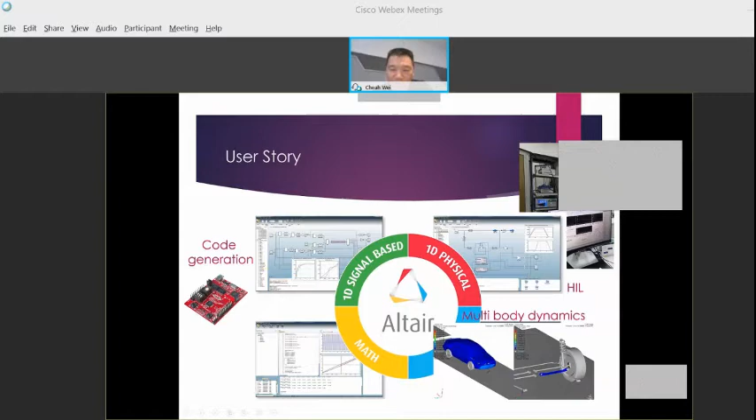And you can also do CFD, computational fluid dynamics, which is used by multiple MNCs. And you can do system level simulation like control systems. And you can even do other domains like electromagnetics. For my case back then, it was the motor design itself, right?

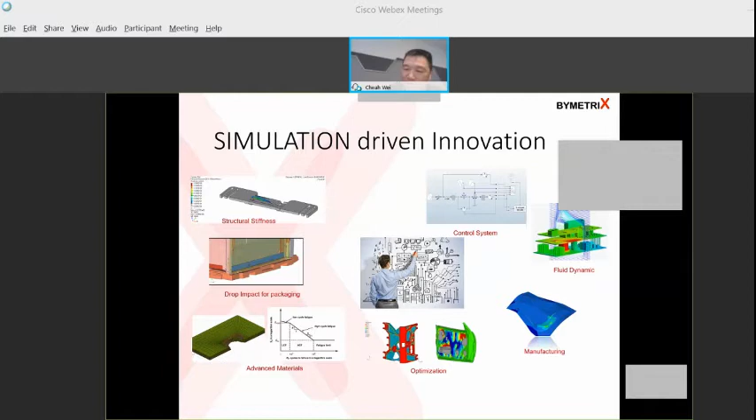So these are just, in terms of a diagram, the different domains and applications. For example, in structural, you can do vibration, acoustics. So simulation tools nowadays can do cross-functional, multiple domains like this. And this photo also shows it to you. You can analyze the stress, you can analyze the computational fluid dynamics for the airflow.

So all this you actually need to run on a backbone, like maybe it's a high performance computing, maybe it's on the cloud. So basically, most of the computer aided engineering nowadays actually offer this kind of seamless integrations, and we call this the simulation driven innovations. So I'll actually skip this slide. It's kind of repeat on what I briefed just now on the V diagram.

So I hope you can look at this video. If there is no sound, maybe I would get back to you later. So in this case, it just shows you, after you design your products, after you simulate it, when you deploy, how fast is it for you to actually deploy it to a real system. So of course here it just shows an Arduino, which is very simple. So that is easy for academics to actually adopt to the syllabus, and also easy for even engineers to actually learn. So it takes about 1 minute, this video.

If you cannot hear the sound, let me know later. But basically, you can also try to understand by looking at the video how the diagram or simulation diagram can become the code. You can see here it's okay. Yeah.

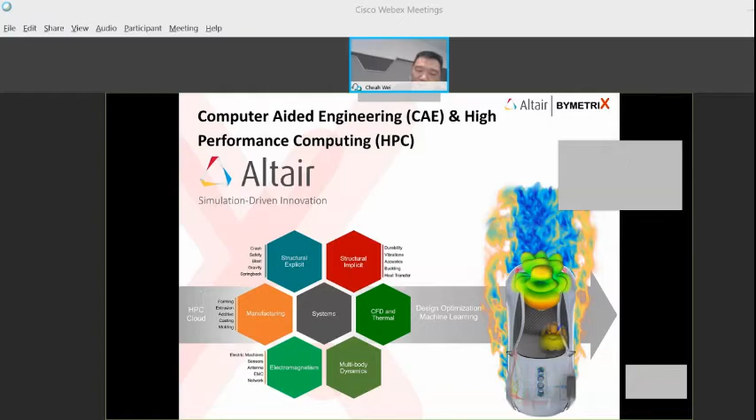Yeah, just in case some of you cannot listen to what it says. So basically, in a block-based development environment, assuming we already simulate at the system level, now we just want to deploy. So what it says here is we drag in certain blocks that generate the signal, certain blocks that convert the signal into data that is acceptable by the microcontroller. And there are blocks that represent the actual output that can be deployed onto the microcontroller, let's say an IO pin.

And before you actually deploy, you can plot the graph to see the output, whether it is meeting your expectations. So if you go to the next step, which I'm going to continue the video, you see how it actually generates code and targets the board. In this case, it's actually doing LED blinking, which is a very simple application. So I'll just complete it. It's another 20 seconds. Yeah.

Yeah, great. So I guess that will let you see, from simulation to deployment, it's a shorter way. Of course, if you do a complete system, you will have more complicated models and more complicated problems to solve. But generally, the workflow is the same. Okay, I'm gonna skip the other things.

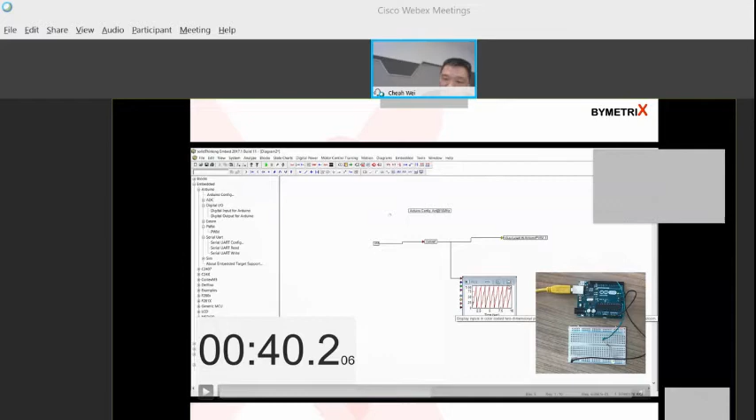So in the case of a bigger scale digital twin representation of the model, we can go through this microgrid case study. For example, in a microgrid, you may want to have some dashboard to visualize all the data. Of course, you can connect all this to the real hardware, but if you want to connect to real hardware, you need to set up a system which may be costly or difficult to achieve or difficult to model certain dangerous situations. So this is where we can use the hardware in the loop environment, which is using things like a low-cost microcontroller to emulate a plant or motor.

And this is how it looks. In this case, it's using up to 5 TI boards, which is the 28377. All these boards are interconnected to each other using GPIO, SPI, CAN. So all these signals or data buses, just like the Arduino example I showed you just now, can be supported by tools like Embed. And all these boards, you can program in the behavior. Let's say I want to program a diesel generator emulator. I can emulate the diesel generator.

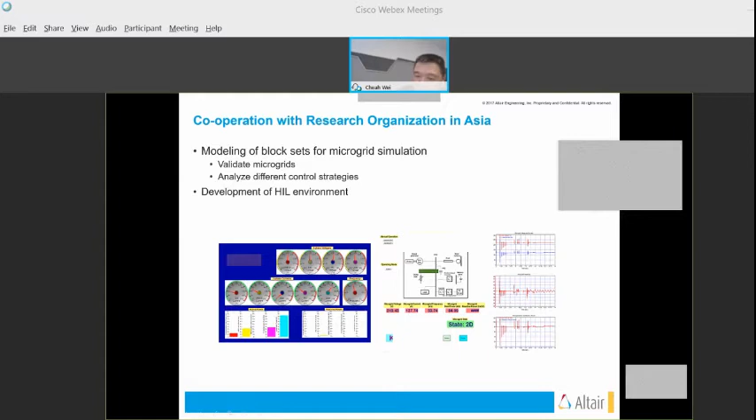I can also emulate the wind speed, the battery, and also the solar. In this case, because it's a microgrid for solar, you can then simulate or emulate different situations. For example, I want the wind speed to be at a certain speed that cannot be easily achieved with a real setup. And I want the battery state of charge to be at a certain level. I want the fuel gauge to be at a certain level.

So this is a benefit of using hardware in the loop. You can emulate the hardware system using a very low cost card without risking, without doing dangerous things, because everything is emulated and it's running in real time. So in this case, you are able to test your microcontroller or test your controller.

Okay. So VisSim here is actually the old name for Embed. So this is what we have in the actual case study for a lab that we set up in Thailand. In this case, you can see we can also use higher end hardware to actually emulate the entire system. In this case, it's an MRT drive, which is actually for a drive motor.

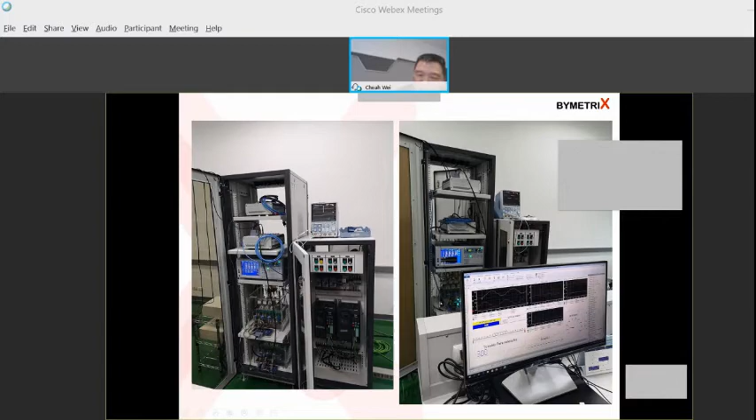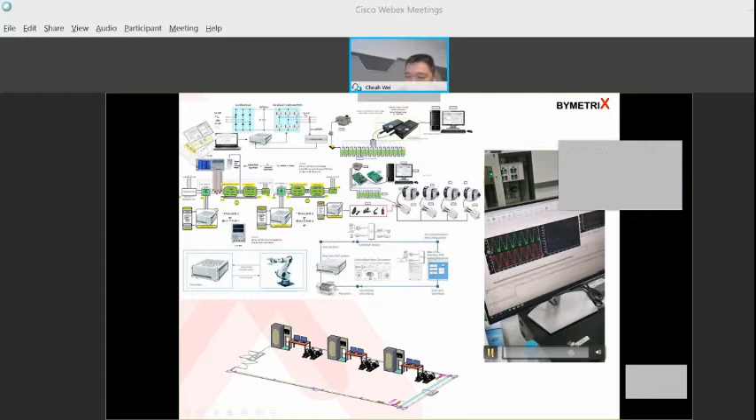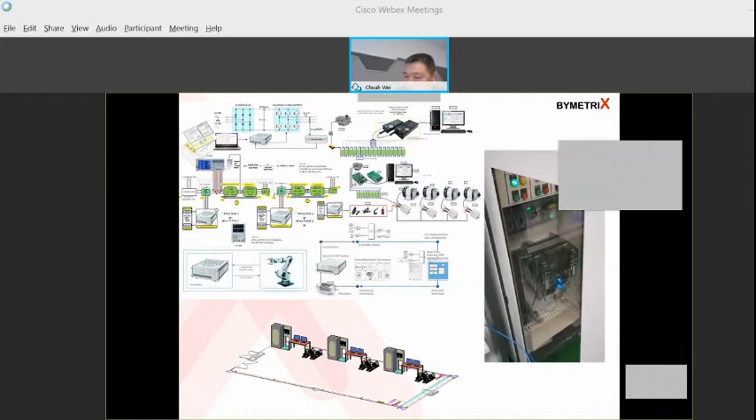I think I have the video as well. These are all the MRT motors. And this is roughly the setup. You have multiple stations and multiple of these motors all connected through a SCADA bus. And this is actually the entire block diagram of the setup. And this is the video to let you take a look. You can actually emulate the signal onto all these test devices. And these are the motors.

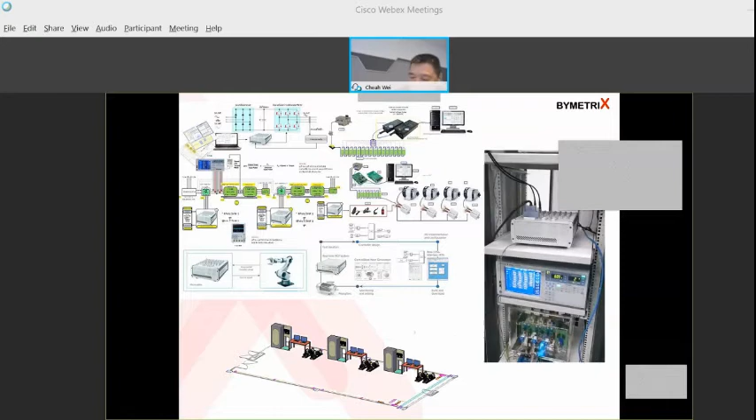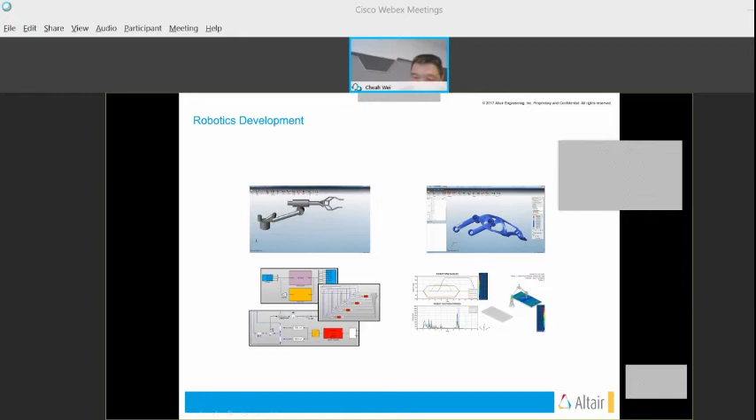Right. So this is actually where model-based design can be used. Some videos I will show for other applications. This is a system level simulation that you can also visualize. Nowadays, all this visualization can be interchanged with the word digital twin because it represents your robot arm digitally. So in this case, you can see the virtual robot arm can move in accordance to your simulations. I have other videos that showcase a range of possibilities that can be done by digital twin. So I'm going to skip some of this.

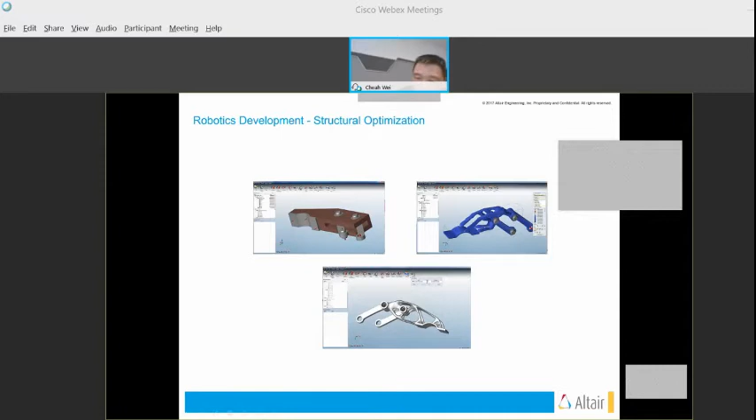This is the shape optimization. That means if you originally have a design like this, you can use the simulation tools via model-based design to optimize the topology or the shape. It actually will change for you. In this case, it's not done by a human. All these changes are done by the software for you.

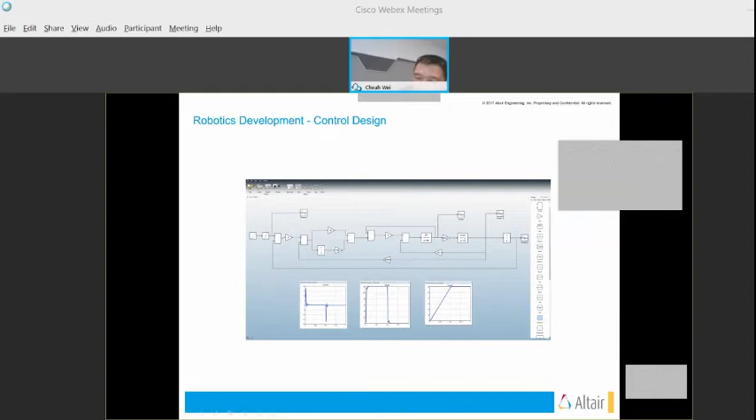Okay. For control system design, we have the tools to let you do the equivalent of a PID controller or your control system. Provided you can model the system, you can use blocks like this to represent the plant response and design your controller. And you can further visualize everything.

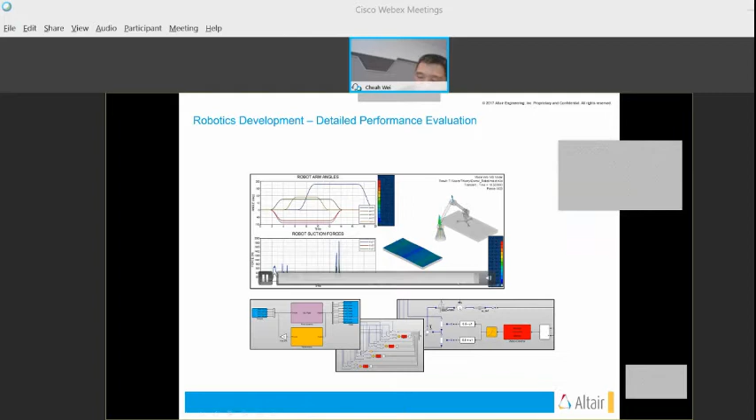So I show the video again of a robot arm. In this case, it's actually taking a flexible thing and flexing it around. And in the simulation, we also show the stress that is experienced by that flexible device. So with this, the entire digital twin model of your system can be realized with a combination of the simulation tool and the visualization tools. Later, I will show you another example of how we do things from scratch.

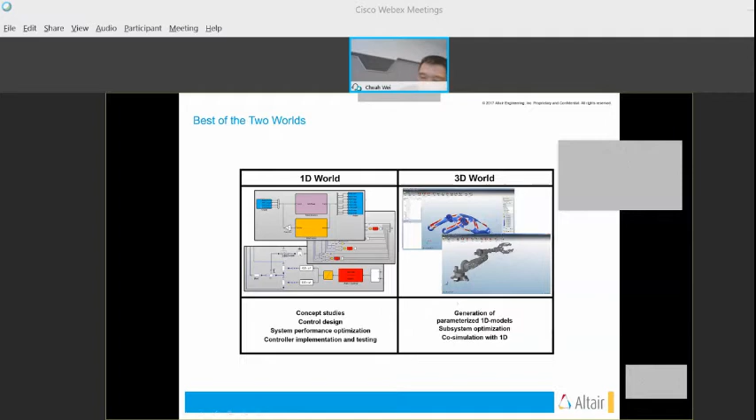So in short, in model-based design, you can bring the one-dimensional block-based signals you use for system level simulation, concept study, control system design, controller implementation, and optimizing your performance, up to looking at the 3D model, where you can do what we call co-simulation with a 3D world to visualize the thing. I will have another example that shows the concept more clearly.

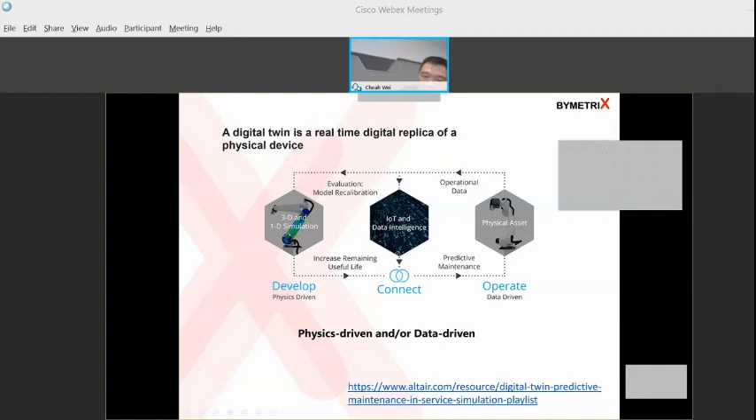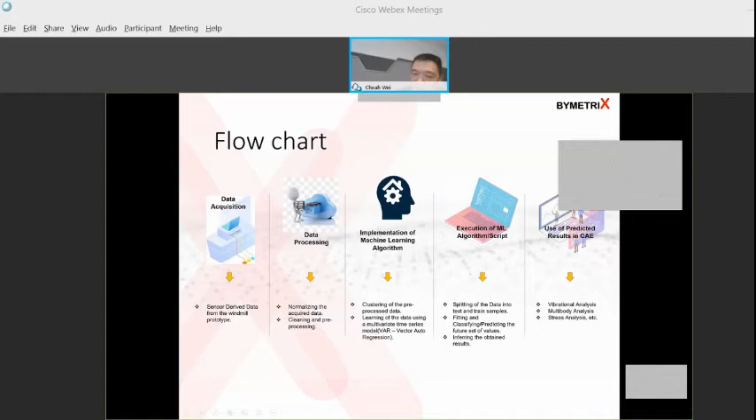This is another test setup that we physically set up right now at SHRDC, the Selangor Human Resource Center. So it's actually a fan blowing to a wind turbine. What we do is we collect operational data. We purposely make some failure. We collect the data by making some screw loose or kicking some place.

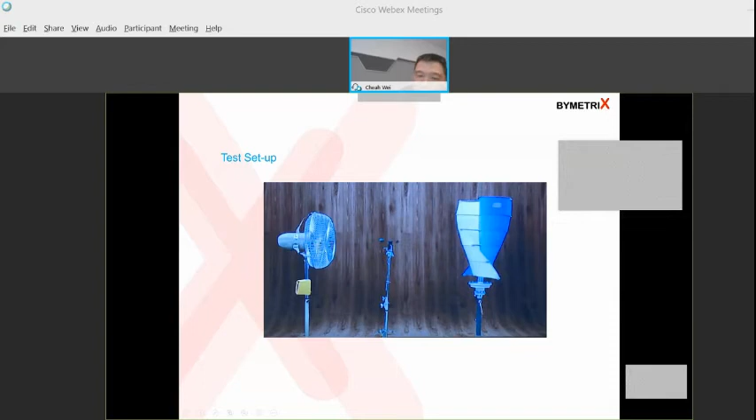And the collected data, we use it to create a predictive model, and we can detect what failure might be happening to the wind turbine. So we use this as a showcase demo at the Selangor Human Resource Center. The devices that we put in are strain gauge, accelerometer, and of course the wind turbine also produces voltage. And we also have an optional anemometer to collect the wind speed.

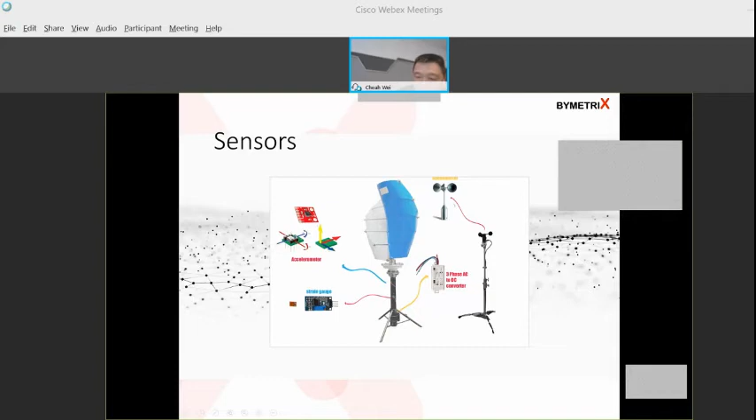So this is how the simulation looks like in 3D. In fact, this is using MotionSolve, which is the multi-body simulator, where you can model and visualize the stress that is induced. So you can use this as part of your machine learning model.

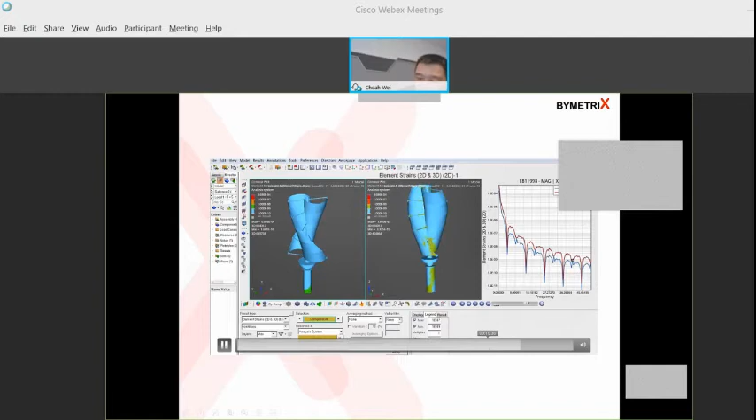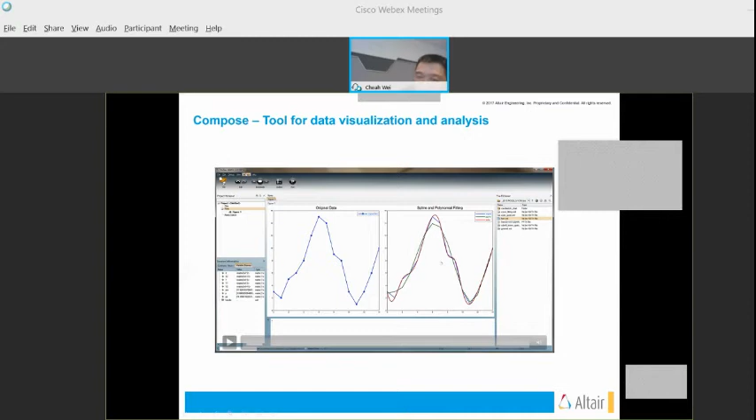So the other few slides, I will just roughly show you how the environment of this mathematics tool looks like. This is the environment that you can use to process the data, from things like curve fitting all the way to integrating it with Python to do machine learning. And for that particular demo that I showed you just now, these are the actual screen output. It shows all the data.

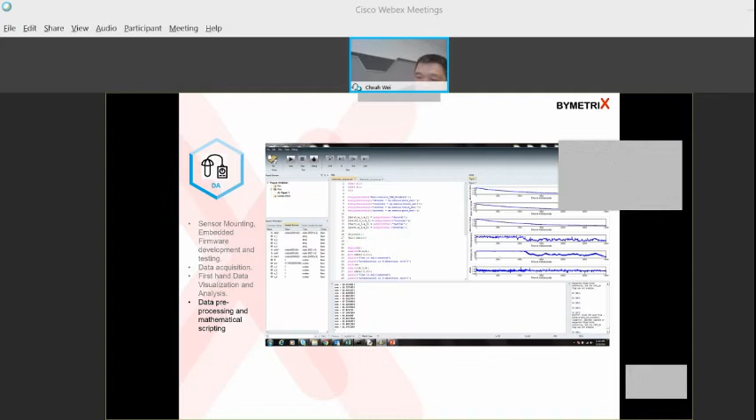And this gives you an idea of the setup that you possibly can have for machine learning, all the things that are used. For example, under classification, under supervised learning, you can support SVM, KNN. Because we can just run Python as it is, you don't need to recreate the wheel inside our simulator. You can just use Python to do it.

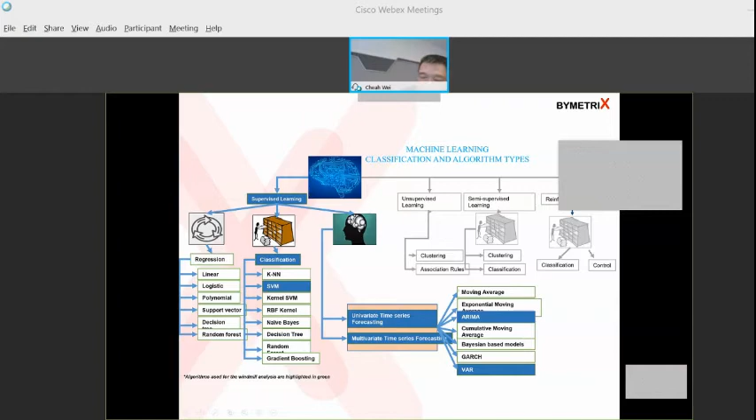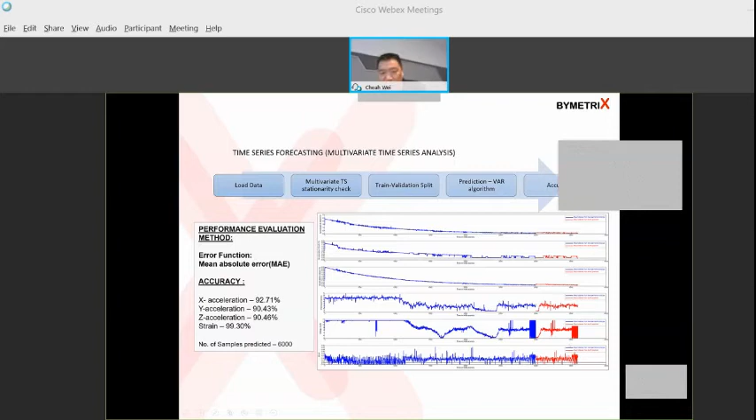So just now I talked about the model. So how do we implement this onto a real IoT system? What we have covered earlier is we use Compose, which is the mathematical environment to model mathematically. We use Activate, which is a one-dimensional signal-based block. Then we deploy it to a microcontroller or your actual controller using Embed. You can also use other finite element tools to do structural simulation.

Eventually, you have your model. You want to implement it onto your IoT network. We don't explicitly just support our own tools, but under Altair itself, we also have an IoT service called Altair SmartCore. It's a way for you to manage the data, and you can even visualize it using Altair SmartSight. So it's like a cloud dashboard.

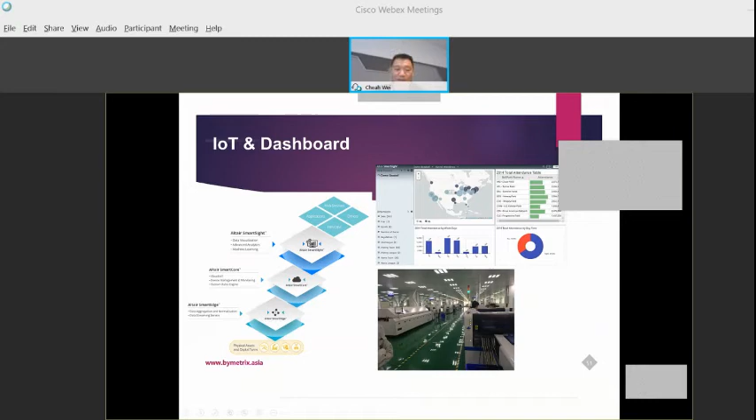You can probably see output like this across the United States plants that you might have. Okay. Yeah, the rest I will skip because it's not model-based design. It's cybersecurity, but not a lot of it.

But the key takeaway is that today I shared about model-based design as a design philosophy, and it can be used as a digital twin to do predictive maintenance. And the purpose of achieving all this is not just because it's Industry 4.0; it's actually something a lot of companies around the world are adopting, because at the end of the day, it can potentially provide a good ROI.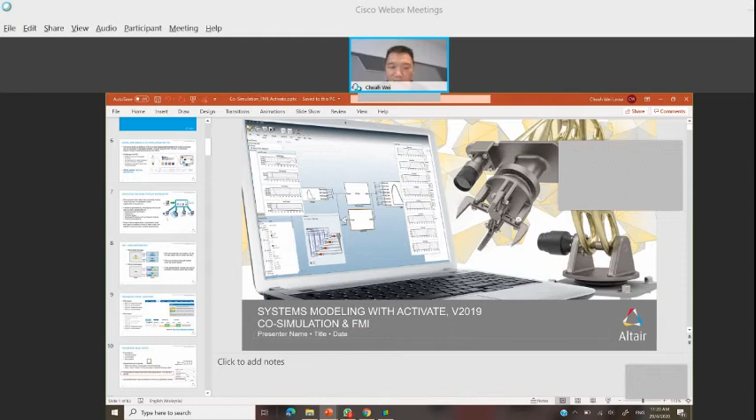Right. So with this, I want to go slightly deeper into co-simulation. So let's say you have the one-dimensional model. How do you actually run it together with a 3D model? So the technology is using this thing called FMI, right? So I'm gonna make this screen bigger. This is called a functional mockup interface, which is an open standard adopted by many

simulation tool providers, not just limited to Altair or a few. In fact, even companies like Ansys and MATLAB also have this kind of interface. The purpose is for tools from different domains, such as thermal or system level, to talk to tools in other domains. So it can be across different companies as well.

So for example, if your university or your company has Ansys, you can actually use it to talk to MotionSolve in Altair tools, because both of them support the functional mockup interface. So I'll just show you one more slide on how they actually interface with each other.

So this FMI can do two main things. One is model exchange, by just sharing the model data from one tool to another. The deeper one is FMI for co-simulation. That means we can use one tool through the FMI to talk to another tool, get the solution, come back, and then do a loop. So this is the topic that I want to mention, the co-simulation.

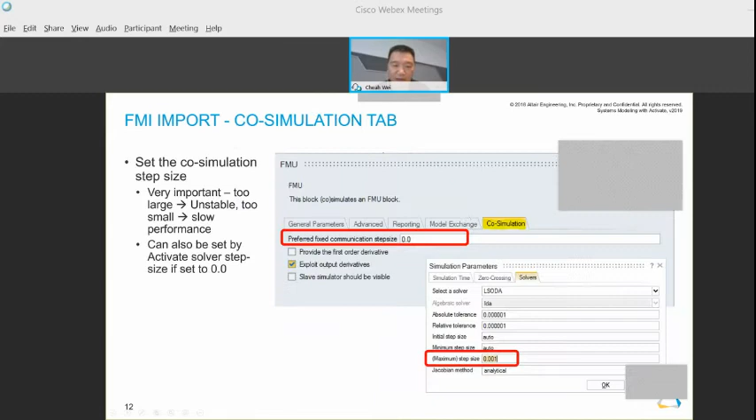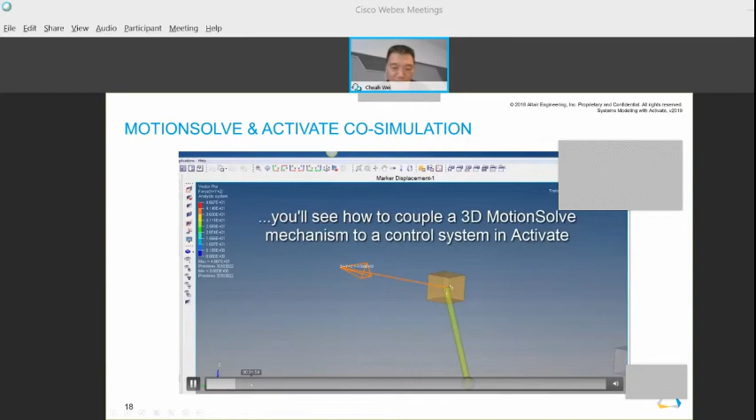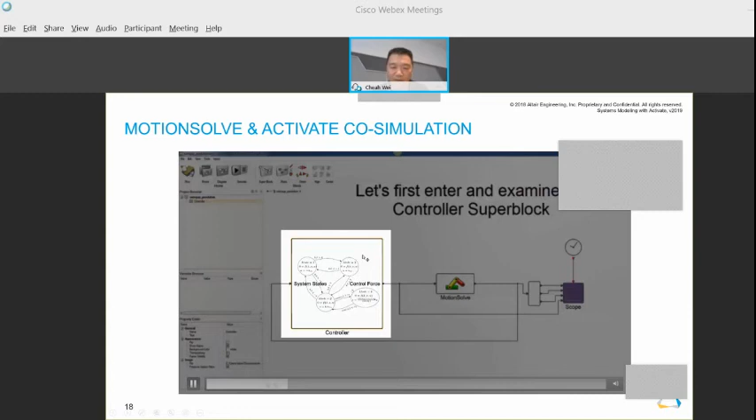So in this particular case, it's an inverted pendulum in MotionSolve. So how do we achieve this co-simulation with other tools? We use Activate, which is in these tools, right? We can define the controller. In this case, it's using something like a finite state machine, and it goes through the MotionSolve block later on.

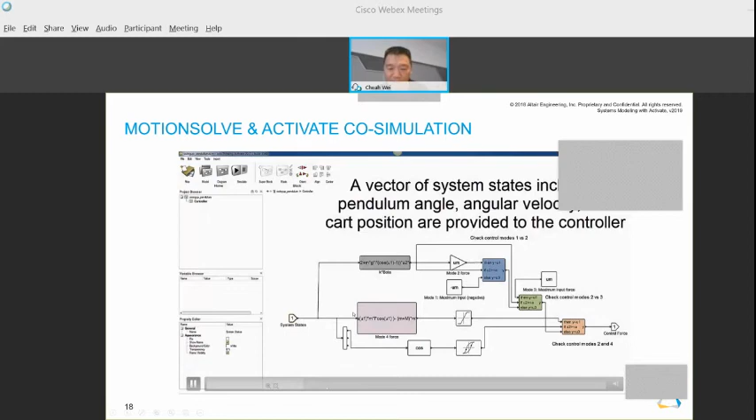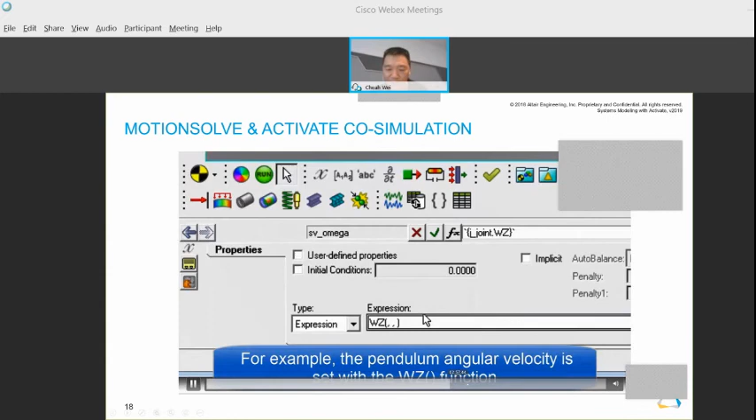So this controller internally will look like this, right? All the blocks, the plant. And this block will connect to MotionSolve through a functional mockup interface that talks to another tool. And this functional mockup interface tool is this 3D multibody simulation. The rest is just the settings. After defining the proper settings, you can run the simulation and visualize the output.

So in our education kit, yeah, we have come up with something which is just a linear stage. Let me just close this. This will be the last 10 minutes of my presentation.

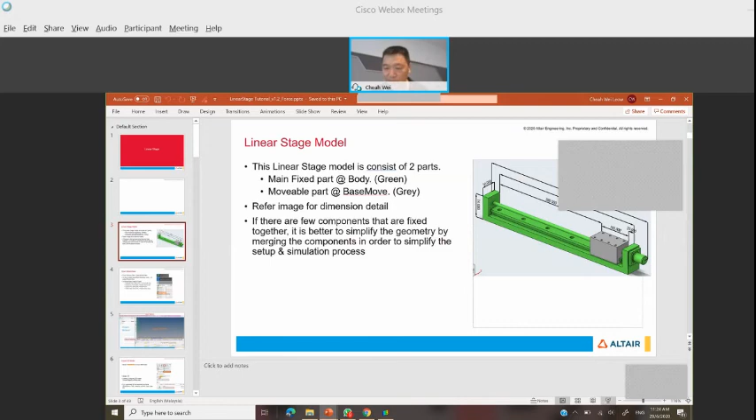So we actually have created this linear stage. So basically, this is to show how you can do this kind of simulation, right? We use a typical CAD program to draw and export the model into the MotionSolve file, and then we can... right. Let me just skip to the portion.

Right. So basically, we need to define two blocks. One is static, which is the green color. One is moving. We define the blocks, the points, or what we call the joints, and we also define the body. We define whether we want to provide force input or motion vector input, and then we can use an external program to provide all the stimulus. So in this case, we are using Activate.

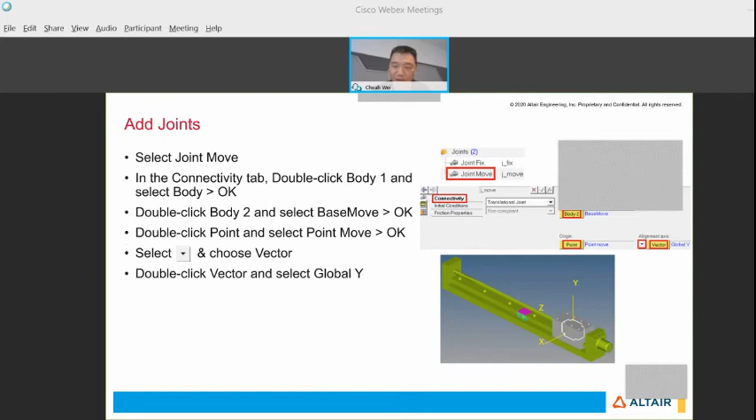So let me just close this. I'll show you the model. Right, close this. Right. So show the model. Right. So this is how my model looks like in the control system portion. Okay. Give me some time to turn on. Yeah. So

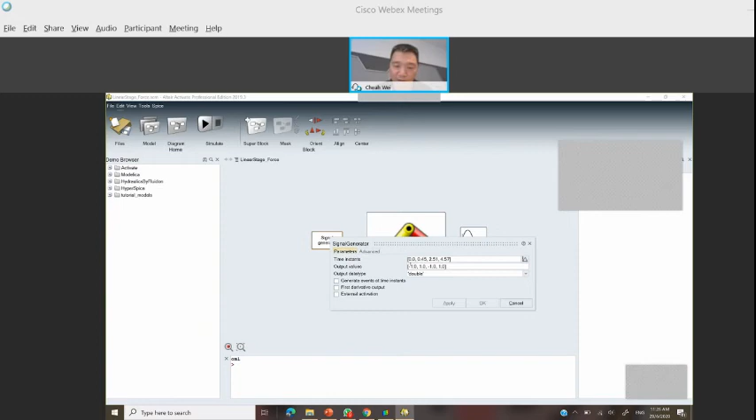yeah, so as you can see, this is my functional mockup interface that points to some files that I have created in the multibody, and I drag in a signal generator to define the output value versus time as a vector, a force vector. Then I can look at all this data. So what this co-simulation does is, except the center portion, everything is running in Activate. It passes the data to MotionSolve to simulate and return it.

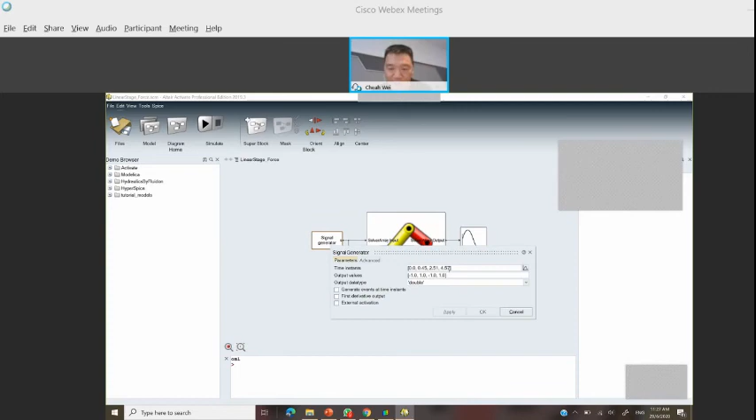So the end result is, after I do the simulation, I can load the model, which I previously ran. The last time I ran it was last night, so I don't want to rerun it just to save time. So this is the model. My input, as you can see, has this time vector. If I visualize it, it will look something like this, in an X and Y sequence. Basically, it just goes to some place and goes back. So you can see it by playing the result.

Okay, let me just open it again. Force. This one. Right. Not sure why the video didn't pop up. Okay. Sorry about that. By right, you will see it playing. Okay, maybe I need to simulate one more time. Let me just define it again. Maybe change the file. Let me just simulate one more time. If it doesn't show the video properly, we can temporarily forget about it.

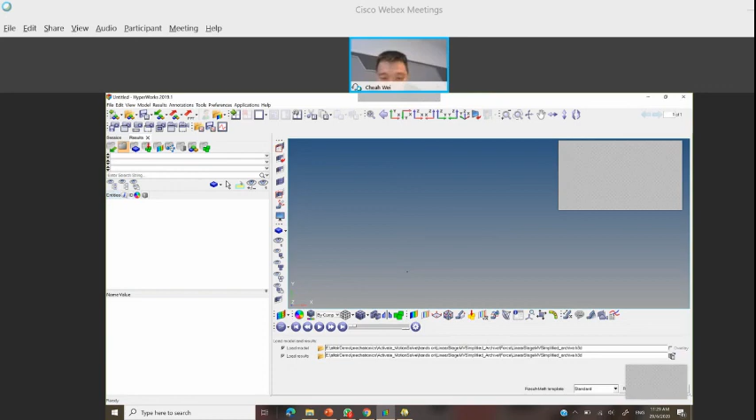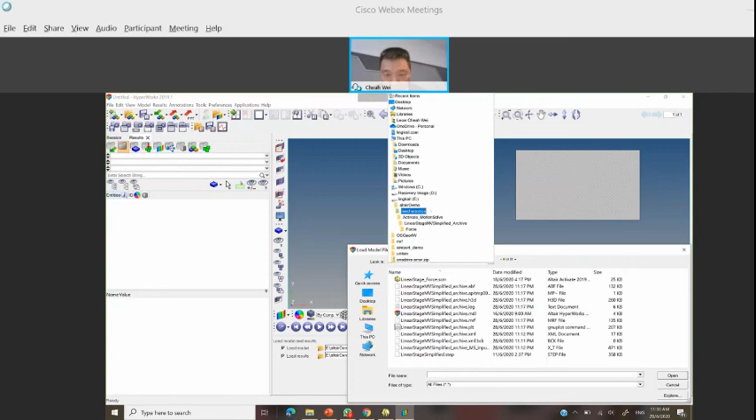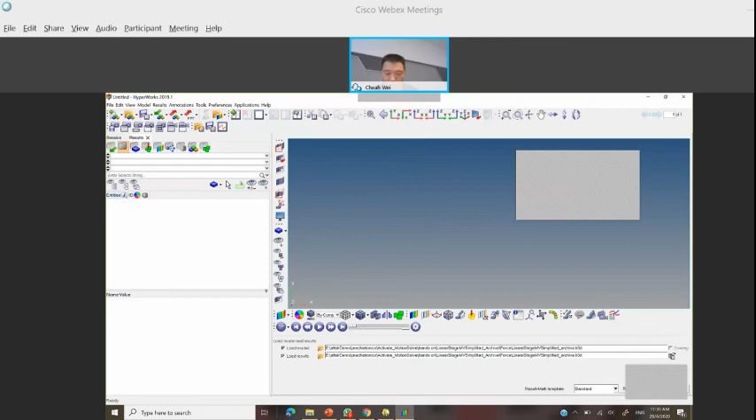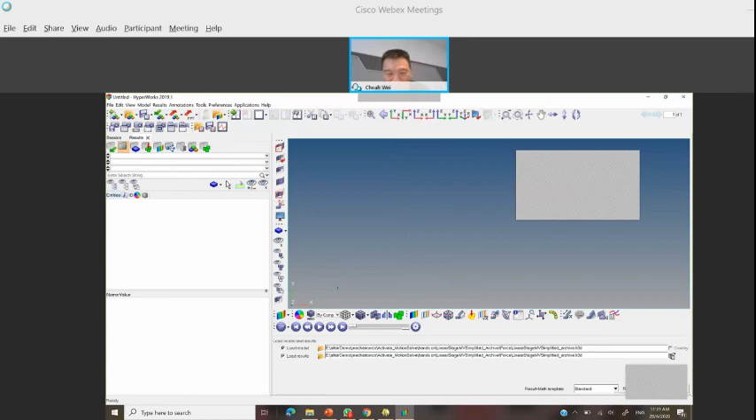Okay. We just play one more time. For some reason, I didn't see the video animation mode. Let me just close it one more time. HyperView. Let me try to load one more time. Force. Oh, this one I need to set to view. Okay, so something is missing. I will skip this portion, but by right, you will see my model look like this. Maybe it's the web conference; this cannot be rendered properly. But you should get the idea of how it runs, and then you get the output in 3D. Apologies for the problem.

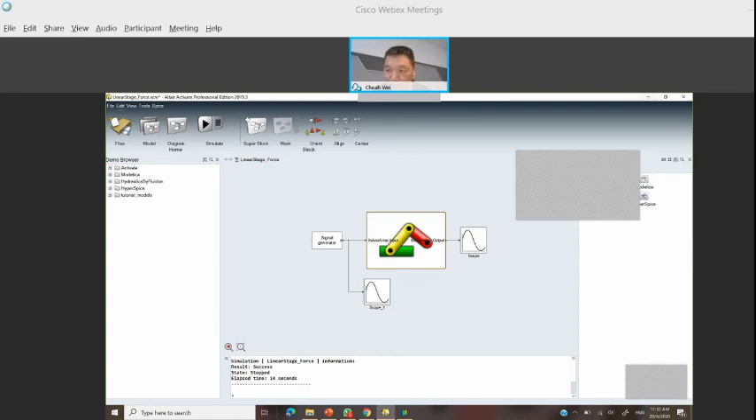So with this, I want to end my presentation. Although we started a bit later than planned, I tried to catch up by presenting quite fast, so hopefully you got the whole thing. This showcases how to use tools like CAE, computer-aided engineering, to do a model-based design approach, a simulation-based design that eventually can also target hardware, and you can visualize it as a digital twin. So with this, I end my presentation and we go to the question and answer.